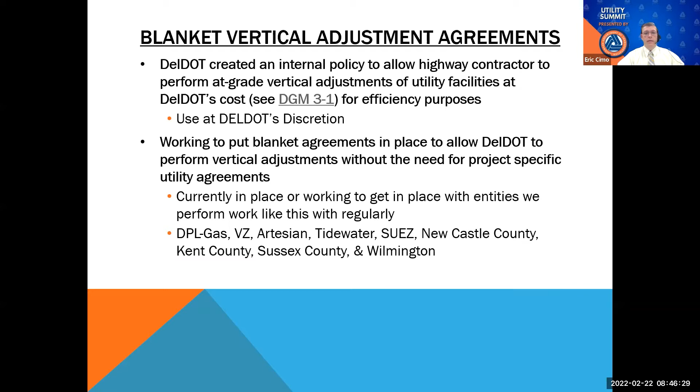So from an agreement standpoint, it's more efficient. And from a DelDOT highway contract standpoint, it becomes more efficient since the highway contractor can perform the work without needing to coordinate additional parties to come in and perform work.

Another thing we've put emphasis on over the past year, and utility companies will continue to hear a lot about, is cost estimates. I've provided information here on requirements from FHWA. Everything we do needs to meet FHWA's requirements. So information related to cost estimates can be found at their program guide on utility relocation and accommodation on federal aid highway projects. Again, the link is here.

These presentations will be posted, so everybody will have access to the links. This FHWA document is based on the federal code, the Code of Federal Regulations.

In particular, utility agreements are outlined under 23 CFR 645.113. That does include information about cost estimates. And then specifically, utility cost development and reimbursement requirements are set at 23 CFR 645.117. So we are working to make sure cost estimates we receive from utility companies are in compliance with these requirements.

So again, folks will continue to hear emphasis on this. I did include a snapshot here just to show the information that should be included with cost estimates. And I highlighted that estimates should include sufficient detail to provide the state and the FHWA with a reasonable basis for analysis. So again, this should echo what I've been telling folks through the monthly meetings and through the individual project coordination.

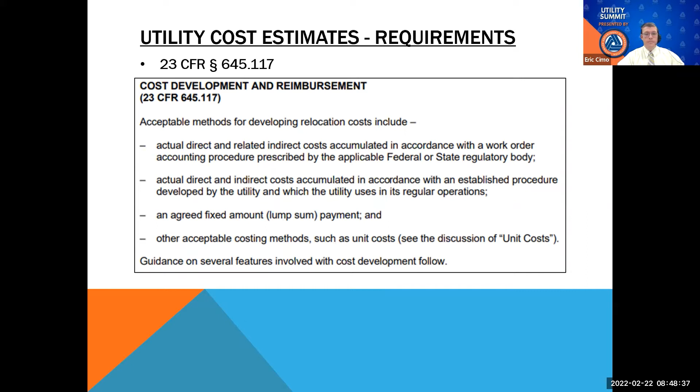This snapshot does come directly from that program guide. And then additionally, another snapshot just providing more information related to cost estimates. Just to reemphasize, estimates need to provide enough detail for DelDOT to verify the costs. I've shown some examples for how we can break out the costs to provide that detail. But unit costs and quantities need to be included, and that information needs to match whatever has been coordinated for the project.

Another item we've been putting more emphasis on the past year, really probably the past 2 years, is trying to improve our utility schedules. So we're having a lot of coordination in sharing what we call utility bar charts, also called utility relocation schedules. What we're trying to do with these is incorporate the highway project schedule and the utility relocation schedule, whether advanced or concurrent, so that we have a good projection for our highway contractor.

This is a requirement from the Federal Highway Administration, as mentioned previously. So we need to make sure that we're providing a good level of detail here, and it needs to be broken out by duration, or by activities. So it needs to include activities and durations, along with when in the sequence of construction the work is going to happen.

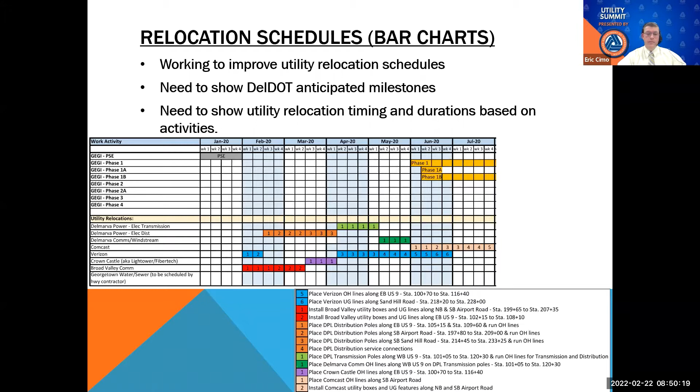So next poll question: which broadband providers are on the call today? Verizon, Comcast, Mediacom, Atlantic Broadband. If you guys could please provide insight there. Skynet. All right, thank you.

So broadband. FHWA has put a rule in place called the Broadband Infrastructure Deployment Final Rule. Again, 23 CFR 645. It was published December 3rd, 2021. The link is provided here. Again, folks will have access to this link once our presentations are posted.

But the point is to facilitate the installation of broadband infrastructure throughout the country. And what this rule does is it requires states meet specific registration, notification, and coordination requirements to allow broadband to move forward.

The main points for DelDOT: we need to identify a broadband utility coordinator, create a registration process for entities that want to be included in coordination, establish a process to notify broadband entities at least annually of our STIP, and coordinate initiatives with other entities including state and local land use and transportation, along with the broadband companies.

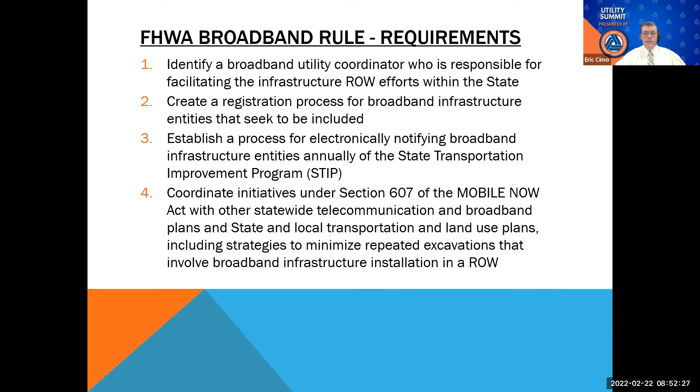So we're actively working to meet these requirements. Our goal is to create a web page with an online registration system. Once we get this stood up, we will be reaching out to the broadband entities already in our database to try to get this rolling, and then the information will live on the web page so we can make the necessary notifications.

The deadline, FHWA's deadline for us to have this up and running, is March 3rd. So we are hoping to have something out and up and running prior to that date.

All right, more questions. Where can information be found regarding DelDOT policy behind blanket vertical adjustment agreements? This is the test, to see if folks were paying attention or not.

All right, looks like the majority have it. That's DelDOT Design Guidance Memorandum, DGM 3-1.

Next one: where should I go to find more information related to utility cost estimate requirements? The DelDOT Utility Manual, FHWA's Program Guide, or DelDOT's website?

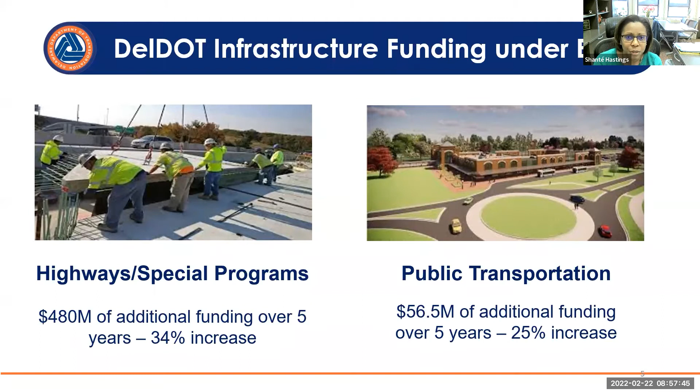We've got some new programs, and some increases to existing programs. On the new side, you heard the Secretary talk about resiliency and sustainability, so you've got EV charging under that for a little under $18 million over the 5 years.

You've got the Protect program, which is also resiliency and sustainability focused, at a little under $49 million for the 5 years. We have the carbon reduction program at a little over $27 million. We've got a significant increase in bridge funding, $225 million over the 5 years, or $45 million each year. And then lastly, our standard formula funding that we receive every year has been bumped up to $160 million for those 5 years.

On the EV side of things, we're going to be looking to strategically deploy EV charging infrastructure and really have an interconnected network. With the Protect funding, we'll be planning for resiliency improvements, evacuation routes, and at-risk coastal infrastructure. On the carbon reduction side, we're looking for any types of projects or programs that reduce transportation emissions or other carbon reduction strategies.

Bridges, as you all may know, we have some of the best bridges in the country. We are at under 2% of our bridges being in poor condition, so we're in really great shape. Part of that is because we have put other federal and state funding towards that over the years, and now we have this dedicated source of funding for the next 5 years. We're really excited to use that to continue to preserve, maintain, rehabilitate, and reconstruct our bridges.

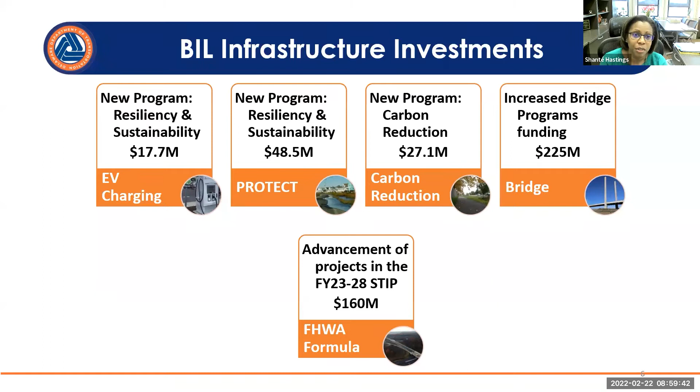On the formula side of things, you heard the Secretary talk about safety improvements, reducing congestion, making connections within communities—all of those standard standalone projects that we do. On the FTA side, a little under $57 million over the 5 years. We've got our Wilmington DTC maintenance building that will be done, some technology enhancements as well as microtransit expansion that we're looking to do, and really continuing to increase our zero emission fleet and infrastructure.

So why are the budget and the Utilities Coordination Council linked together? As the Secretary mentioned, it's very important for us to collaborate well together. We are charged with delivering this new, larger program, so we've got to find ways to be innovative and creative and communicate effectively so that we can deliver all of those projects that really improve transportation throughout the state.

Back in 2019, Senate Concurrent Resolution 48 was created, and it established a Utilities Coordination Working Group. That working group met over the course of 2019 and 2020 and made some final recommendations. One of those recommendations was to create a Utilities Coordination Council that would be in code and exist forever. So Senate Bill 152 was signed into law by the governor in September of last year. It created that Utilities Coordination Council, established 13 members to be on the council.

They're to meet quarterly, basically. They elect a chair and a vice chair every 2 years. And annually, they report on their activities to both the governor and the General Assembly.

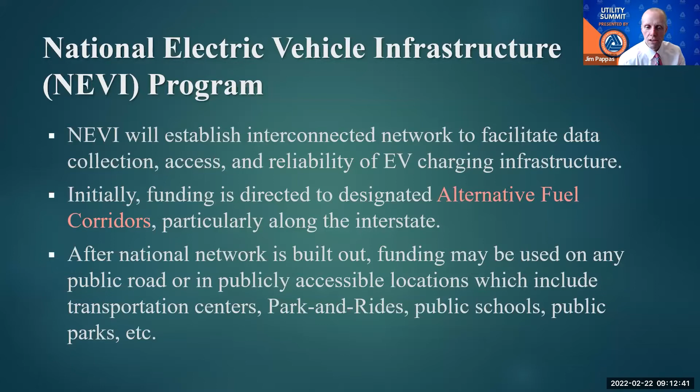We actually had a meeting yesterday with DNREC, and we're going to look to add some east-west corridors potentially as well. The first one that came up was 404 in Sussex County. If you're familiar with Delaware, a lot of people come to the beaches from the west, DC, Baltimore, Northern Virginia, and most come across 404. Ironically, we had a conversation with somebody a couple months ago who came to visit family in Lewes and mentioned there were no charging stations along their route until they got to Lewes. So we're going to look to probably add some additional ones.

There are some specifics here, and happy to have this conversation offline, but within the information we have there are some specifics on the capabilities of the equipment. The EV charging stations have to have at least four 150 kW DC fast chargers. So basically every infrastructure that we build, those are some of the minimum requirements that have to be there. This is what we felt was the perfect opportunity to let our utility partners know that.

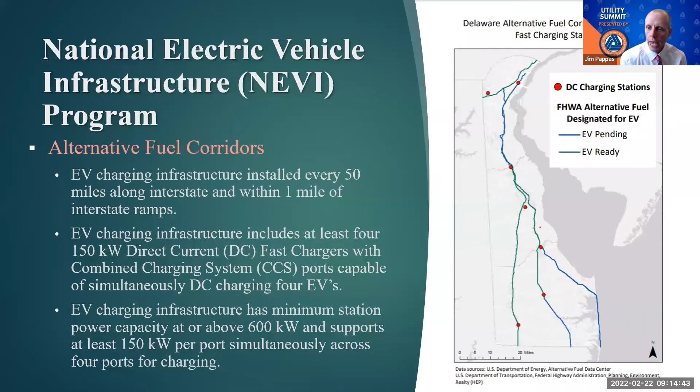We are looking at this information and developing a plan for the state. The idea is that we're going to be able to look at maps like this, find out where there are some holes, if you will, and look at strategic locations where we can add additional chargers.

The secretary started the conversation for today's workshop talking about equity. This is something that's very important to the department in all of our project planning, design, and implementation, and it is for the EV infrastructure as well. The general idea is we want to improve and encourage clean transportation. There are so many benefits associated with that, reducing greenhouse gas emissions, and also just making cleaner air for the communities.

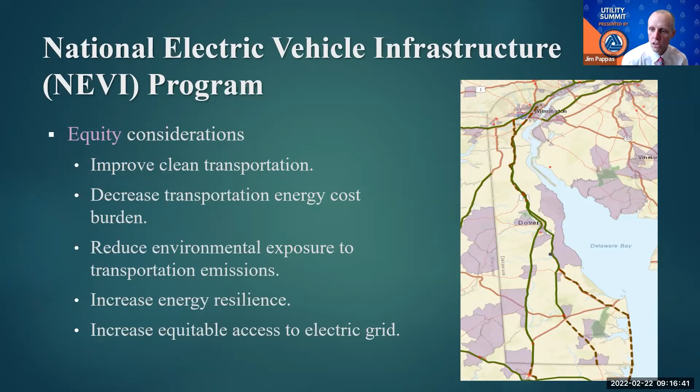We want our children and ourselves to be able to go out on a nice sunny spring day and play sports or just run around, ride their bicycles, and we want to make sure the air they're breathing is as clean as possible. So using these EVs and placing charging stations in strategic locations are ways that we feel we can improve that.

There are a lot of considerations we have to take into play as we develop this plan. A lot of this is repetitive to what I've already mentioned, and I'm happy to provide this slide deck if you want to reach out to me on a sidebar to go over this, because this is just a high level of things we want to talk about.

It was specifically referenced in legislation to work with your local utility operators. Again, we appreciate this opportunity to sit with this group and let you know where we are, where we want to go, and literally how we need your help to get there.

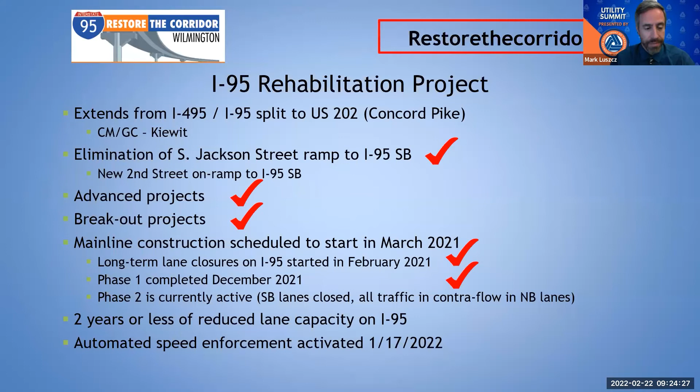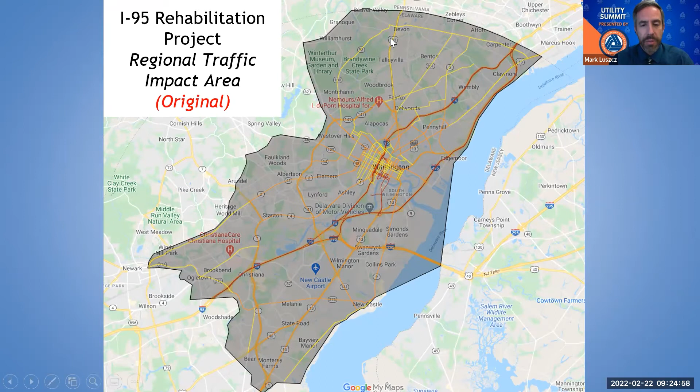So we've been coordinating with Wagman as the contractor and our design team, and of course with utility companies and right-of-way and environmental and all the fun things we do to get these designs done. The hope is - we've had a few advanced projects, but one more on southbound 95 should be kicking into gear shortly, and the main project we expect to have in construction later this year.

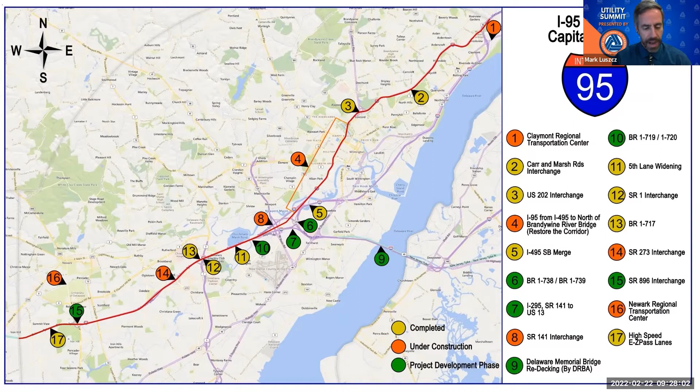There's also additional bridge work right on the curve, kind of in the middle of the 295 interchange - that's all 6, 7, and 10. We're trying to coordinate all those closely in the 2024 to 2025 timeframe. Let me see if there's anything else hot in this area... I think that covers 95.

We're still working out the details. Again, this will apply to any project requiring lane closures on certain roads - within this zone they're going to have an extra layer of approval. This project is different, obviously, than the Restore the Corridor project, but we are going to have a fair number of ramp closures, some short-term, some longer term. This area really covers all the detour routes of those closures.

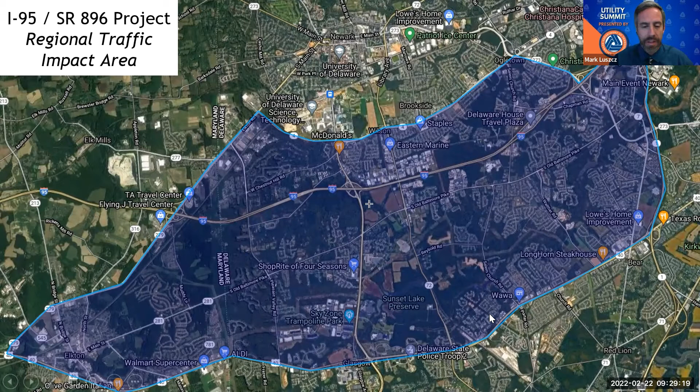So we just want to carefully coordinate and do our best not to impact the public worse than necessary. Stay tuned - there'll be more specific guidance on this coming out over the next month or two.

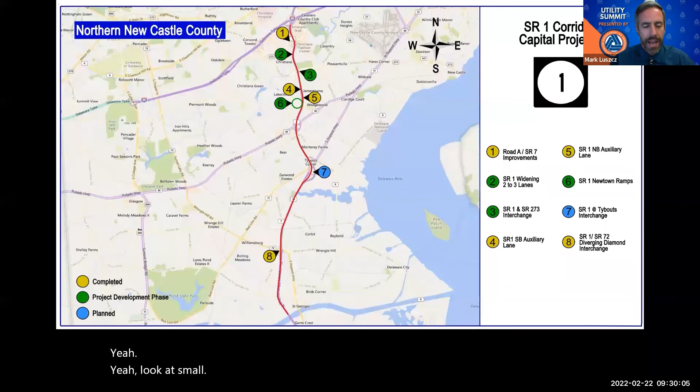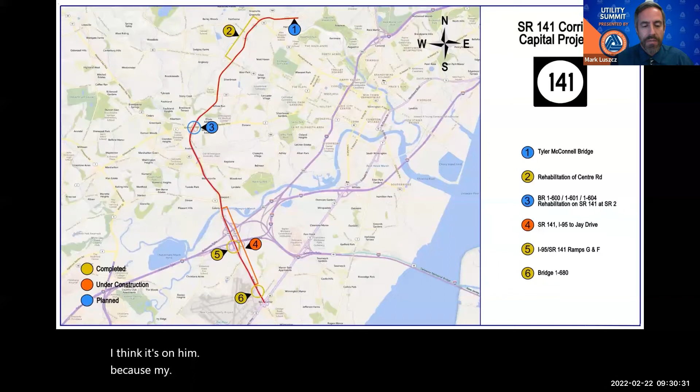All right, the 141 corridor. So I didn't talk about it yet, but the 141 job is mostly done. There's still some punch list work to do, and still some lane closures, but by spring we'll have everything totally wrapped up on that 141 job. Really along the corridor itself, nothing else particularly hot for right now.

There are a couple other things in this area I want to point out. They're not specifically called out but they are in this map area. The bridge 1-680 on South Heald Street on Route 13 going up into the city is a bridge project that's another one we're doing CMGC. We recently brought our contractor on to continue the design efforts there, so that job will have a lot of utility work involved.

And then also the Route 13 pedestrian improvements. We've been working on pedestrian improvements on the Route 13 corridor for several years. Many smaller projects have already been implemented: roadway lighting, crosswalks, parts of a bus lane in the northbound direction. Now we have two big pieces left over, and a lot of sidewalk has been installed through the paving job that wrapped up last year.

So we have a median barrier project we expect to have in construction by the end of this year, and also an additional sidewalk project that should be in construction in 2023. The median barrier project is the hottest one for now. We hope we have some leeway in how we design the median barrier, and the goal is to avoid utilities wherever possible, but we expect there will be some utility relocations needed as part of that project.

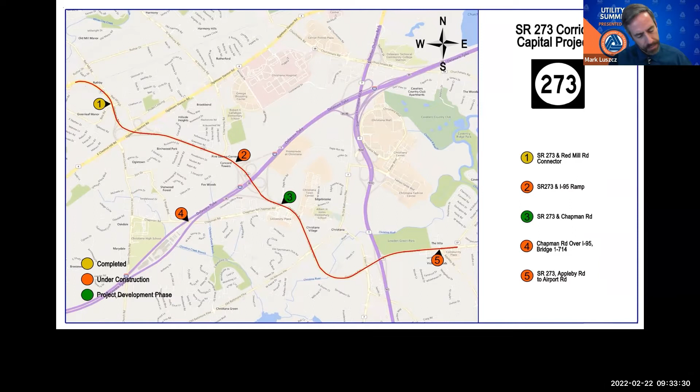Now, a hot corridor particularly from a utility standpoint in New Castle County is Route 40. Most, if not all, of your companies were involved in the advanced utility work for the Route 72 widening job, and that advanced work is completed. We'll be sending that to the DelDOT contractor side, which should be going out to bid over the next couple months, and then we can get that road widening implemented.

The Route 40 at 896 is another grade-separated intersection project, and that's going to have some big operational and safety improvements once completed. We'll likely have advanced utility work on that job, with construction expected in 2024. A little bit ahead of that is the Route 40 widening job from Salem Church Road to Walther Road - another hot one with lots of utility relocations, and we're hoping to get that into construction in 2023.

All right, and then we have the 299 corridor. That is in construction, of course, and that's one where there was advanced, but also concurrent utility relocations going on that project. So that one is cranking along in construction, and there's a couple other projects in the area, but nothing particularly hot.

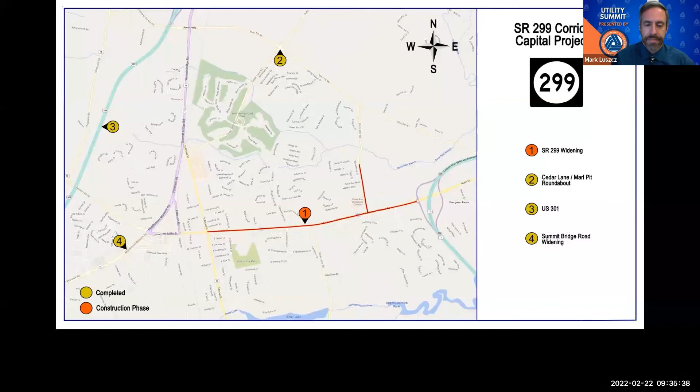All right, moving on to Kent County. We definitely talked about this, the Route 13 in the Dover to south of Camden area last year. Over the next few years, this is going to be a hotbed for construction and transportation improvements between the Route 13 widening projects and the Camden Bypass projects, and also the Walnut Shade Road project.

So say late last year, we did do some shuffling of schedules and rescheduling a bit. Now the Camden Bypass projects and Walnut Shade Road are both scheduled to start construction in 2023. Whereas number one on the screen, the northern section of the Route 13 widening, that's now pushed out to plan to start in 2024. And the lower section, the southern section of the Route 13 widening, is now scheduled to start in 2026.

So a little bit of shuffling around there based on a few things, but a lot of right-of-way acquisition needed on some of these projects. And that ties in, of course, with the ability for advanced utilities, so had to reschedule those a bit. So that's our current schedule on the 13 and the various Camden area projects.

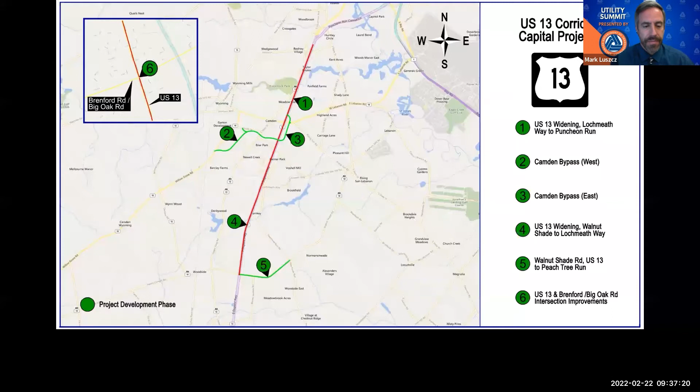For the main project, the design is expected to be complete by the end of the year. Based on our old funding plan, we weren't going to have funding for that until the out years, 2027 or 2028. The hope is, as we finalize our updated financial plan, taking into account the new federal infrastructure bill, that we can advance the schedule for the rest of that Kenton Road project. So stay tuned for more information on that.

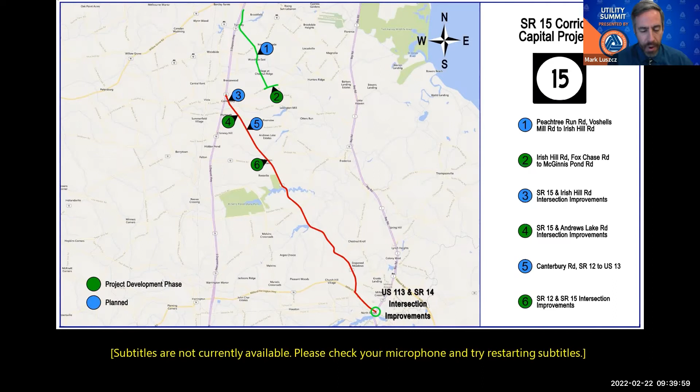On this screen, the one that is farthest along and ready to go to construction, hopefully this fall, is down in Milford, the 113 and 14 intersection.

All right, and then this is kind of the segue slide of Route 1, obviously the northern end in Kent County and the southern end in Sussex County. So really most of the work currently in the CTP in Kent County is complete. All the new grade separated intersections like Frederica, North and South, and Little Heaven and Thompsonville. So all those are complete.

So switching into Sussex County, the hot area of Route 1 is really between 16 and 5 Points. The Route 16 grade separated intersection is going out for bids early this year. Advanced utility relocations have been underway, and we hope to start construction on the main project later in the summer.

Then we have Minos-Conaway, number 12, and Cave Neck, number 11. Both of those are deep into design. The alternatives have been selected. We've had lots of public outreach. So those are cranking ahead. Both of them are hot in the utility area, with lots of utility relocations that need to be coordinated.

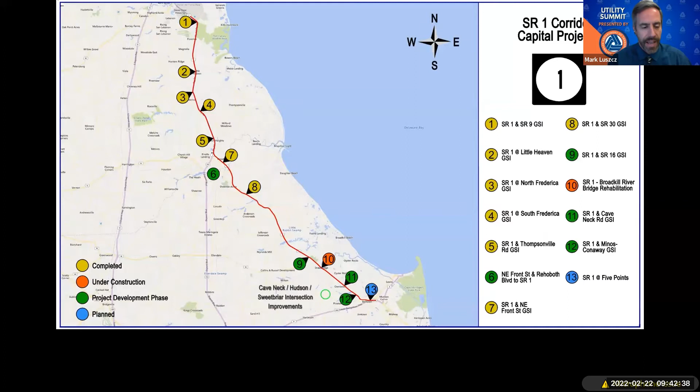Continuing with Sussex County, we have our 113 corridor. Deep into design is the 404 grade separated intersection at the north end of Georgetown. We're also working on the 16 GSI up in Ellendale, and the North Millsboro bypass in Millsboro. All those are going full bore, particularly the 404 GSI, which we hope to be in construction in 2024. North Millsboro we hope to be in construction in 2023 and completed in 2025. That's the goal.

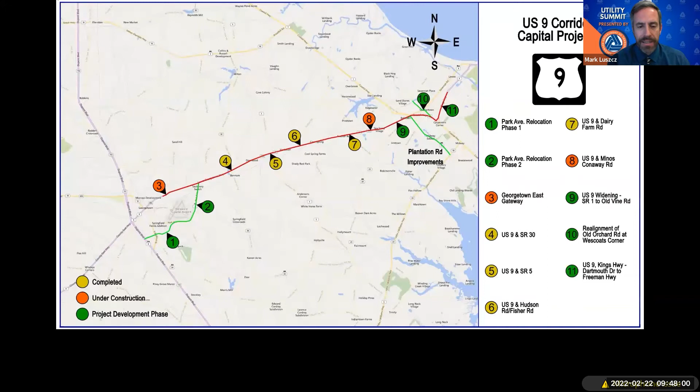All right, and depending on your perspective, saving the best for last: the Route 24 corridor. A lot of work going on there, either in construction already or about to be in construction shortly. On the eastern end, the widening from Mulberry Knoll to Route 1 is mostly wrapped up.

As I was mentioning earlier, we have the Plantation Road project between Route 9 and Route 24. The northern section, now that I have my notes in front of me, we expect to PS&E shortly, so that'll be in construction later this year. The southern section, we're going to be regrouping based on some other analysis of other roads that are part of the Transportation Improvement District, so probably restarting design on that later this year.

Then we have projects 2, 3, 4, and 5, all shown as green right now. Within the next few months, they'll switch to orange on this chart as they'll all be in construction. So, 24 Love Creek to Mulberry Knoll: we have the advance duct bank work hopefully getting implemented within the next few weeks or within the next month, and actual PS&E on the job shortly. So construction starting in the summer.

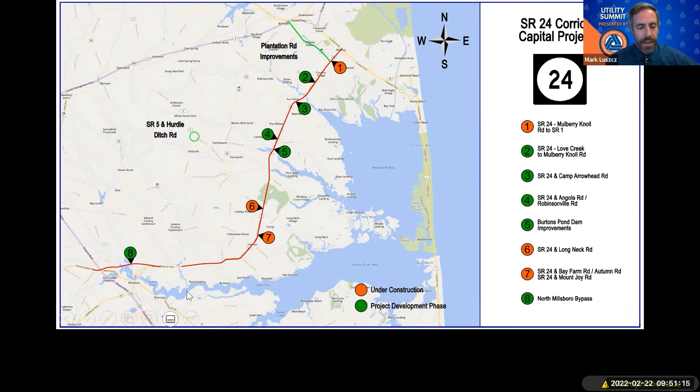So with that, I obviously ripped through that very quickly. Hopefully, all of you, whether you're on the design side at DelDOT, one of our consultants, or one of the utility companies, are well familiar with these projects anyway, given all the coordination that our design teams and utility groups are doing. And so that is all I have.

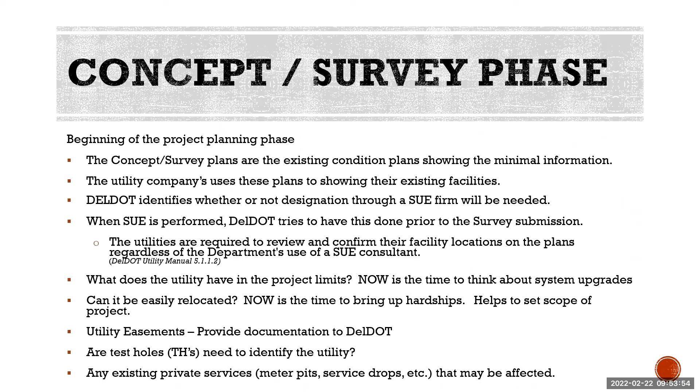Also, this is a good time for utility companies to see if they have internal facilities planned for upgrades, relocations, old mains, or electric that may be incorporated into the project. Most importantly, we need to know if the utility company has any facilities that cannot be easily relocated or an outage that can't be provided. These are things we need to know early on.

The preliminary phase is the first look at the design of the project. At one point, someone mentioned it was a good time to see where the poles are going, but that's not really true. We need everyone's information, whether it's due to conflicts, upgrades, or not relocating, the utility companies still need to respond. And no, resending your as-built is not a true submission.

We understand that we may not have enough design details for the utility companies to know what the conflicts are early on. Most of us don't want to redesign a project more than we have to, but there are reasons why acquiring this information is crucial, one step at a time.

Without the utility company's proposed alignments early on, we're unable to design around or make sure there's enough room for everyone within the footprint of the project. We need early insight on the project's impact so that we can plan for the right-of-way and the PE needs.

We need the utilities to tell us about their right-of-way needs and to incorporate where we can and coordinate where we can place your facilities. Did you know it can take up to a year for us to acquire the right-of-way and PEs?

It really does. So we have to understand the parameters of the project, then we can prepare for the utility issues we may have. By providing us the information along with your easements, it helps us determine the path forward. It gives DelDOT an idea of additional cost for the project.

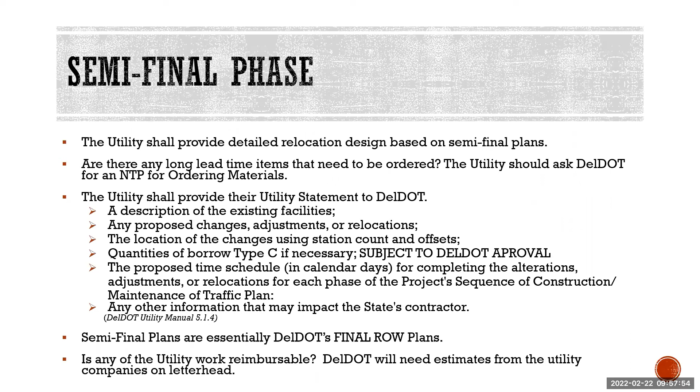Final plans. We arrive at the final plan stage. Now is the time to verify the relocation design based on the final plans. Utilities should have their in-house construction drawings completed prior to the final plans to verify there are no issues or conflicts. This is not the time for the utility company to begin internal construction drawings.

If you wait until this phase, any changes the utility construction department wants may not be accommodated. So get their input early. Designers need to know and take into account all existing facilities and operations, proposed phasing, improvements, highway drawings, and all the existing and proposed utility relocations.

Yes, we have occasionally changed the design of the project in this phase. That is why it's important for the utility companies to just take a look at all the plans. We really don't want to overlook anything, though it does happen.

So I have a question for you, and it's interactive. Why does DelDOT have so many phases?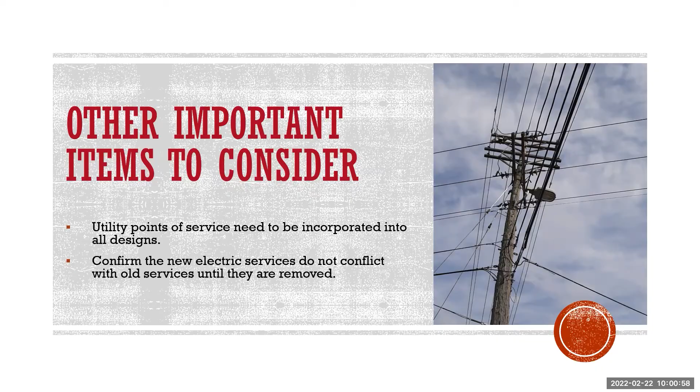Another item to consider is how the proposed aerial lines are being installed crossing existing facilities. This example shows the proposed aerial alignment lines crossing an existing facility. As we relocate, the question is, how are we going to keep these facilities in service while the proposed facilities are being relocated? Keep in mind that an outage may or may not be feasible. Therefore, this needs to be considered as utility companies are creating their design.

My next question: how many times more chickens than there are people in Delaware?

So if you've answered B, 200, you are correct. There are 200 times more chickens in Delaware than people.

Design changes, let's take a look at them. One of our favorite topics and the biggest question is, why are we making design changes so late in the project? Why are these changes? It's because of drainage in the final plans, or the alignment was changed, or we're adding work so late. Didn't we consider this before?

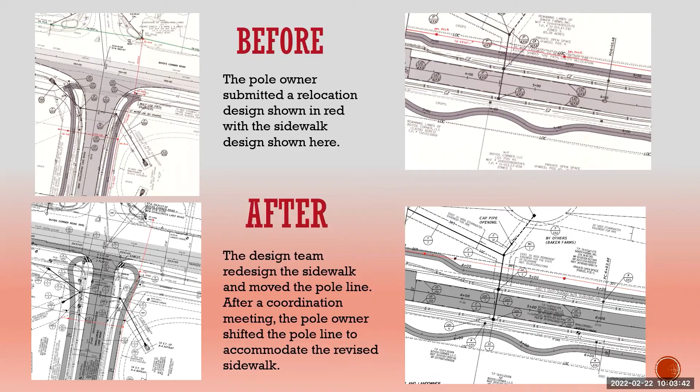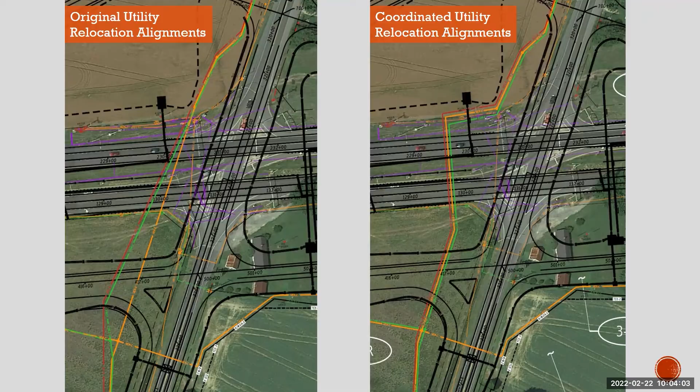Moving into utility changes their design after everything has been submitted. Again, my first question is why? As we talked about in the previous slides, all the design and constructability of a submitted utility relocation design should have been completed. A minor tweak here or there isn't a big deal, but anything major is.

Currently, we have a project where a pipeline company gave us final plans in June of '21. The NTP was issued in August of '21 for advanced relocations. This past November, their construction team reviewed the project and changed a large portion of the relocation design.

Construction is expected in April of 22, so DelDOT and the utility company still do not have an approved design. At this point, advanced relocation may not be possible due to the construction phasing, and the utility may be relocating during construction. This will cause a delay to the project and will cause the project to go over time and budget most likely.

This is why it's important that you submit a constructible final relocation plan. Your change may be good for your facility, but may not be good for the others. Unless you coordinate these changes with the design team and other utilities, a major change in design cannot happen.

Is the project constructible as designed? This is a very big question. Everyone zones in on their area of expertise. So this is why we have several sections involved in the project's review.

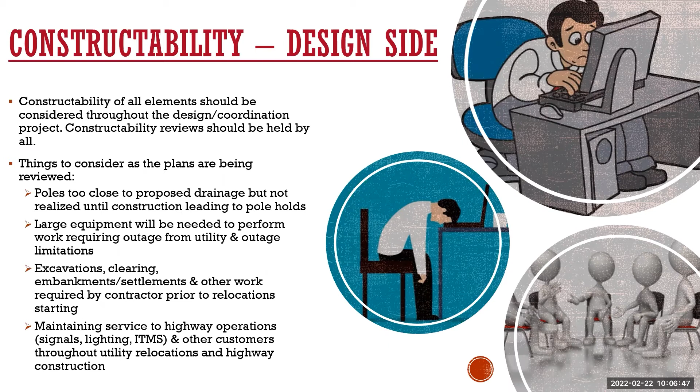Between the preliminary and the final plans phases, this topic of advanced relocation does come up. And why do we need advanced work? Well, having utilities relocate in advance makes sense if there is a lot of conflicts with roadway design, and it may be constructed with minimal impacts to the project and less impact to the public.

However, some things will need to be done prior to advanced relocations, like clearing and grubbing, relocations of fences, mailboxes maybe, or whatever, so on. And if we have authorization to work on the property, with advanced work, as much prep work as possible should be performed and stakeout is requested.

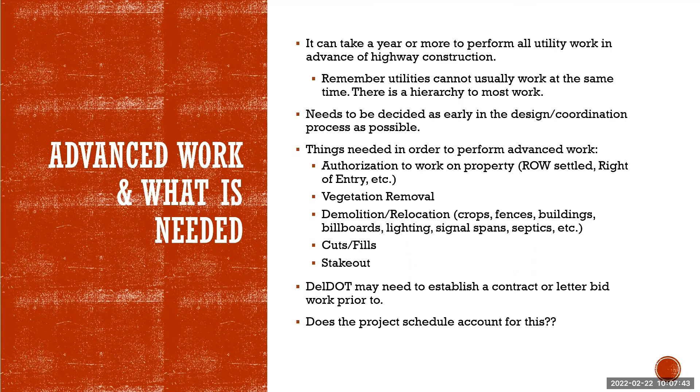Now, the big question is, does the project schedule account for advanced work? And I have another question.

What are the most useful components of advanced utility inspection?

Okay, if you answered all of the above, you are correct.

Utility inspection team is a must. As we just decided to have the utility companies go in advance of construction, now what? The question always becomes, who's going to inspect the work? Over the years, our construction group has had a team perform the inspection. Though this has been great, we find that the area of utility installation is an unknown and requires different skills.

Recently, we've had utility inspectors on projects and it's worked out tremendously. And why do you ask? For starters, having one person is great. Any questions, issues, conflicts, we go to them, they handle it. They are the go-to person.

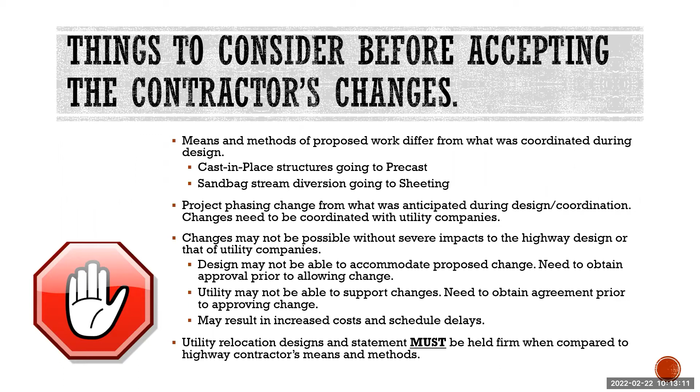Things happen, and there are times when the utility companies need to change their design. Though it may sound easy, it's not. The utility statement of work has to be held firm. This is why utility companies have to have their construction people involved early on, as I stated before.

And once the utility company receives their NTP, they should be preparing their bid documents and packages, not designing their internal plans. Also, the design changes may cause issues with the other utilities involved in the project, not to mention the project's design schedule.

Any changes have to go back to the review process for approval. Any changes can be costly and delay the project. Therefore, we need to hold to the utility statement and schedule that we set forth.

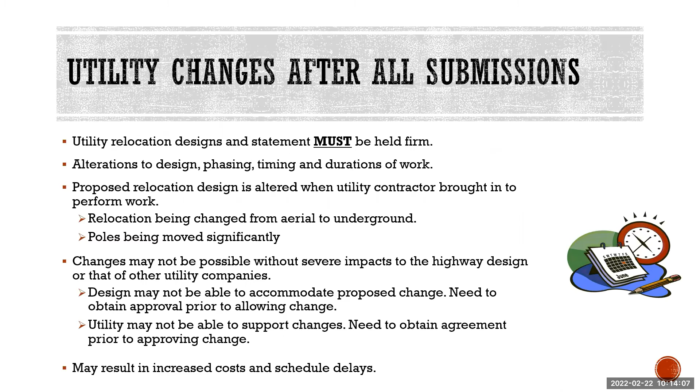When we stumble upon these issues, a design change has to happen in the field. Sometimes it's minor, but not always. One thing we want to mention is any design change during construction has to be reviewed and approved by the project engineer, to make sure it can be done. We want to avoid impacts to the project and other utilities with any changes that may occur.

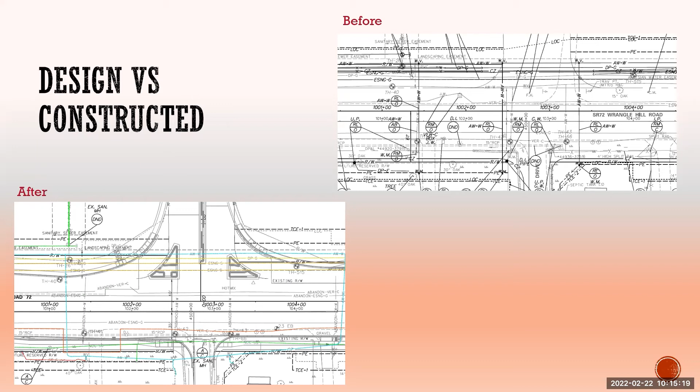Paving rehabs, oh my. Everyone's favorite, a good paving rehab project. Did you know that it's most of the state's budget? It sure is. These projects are quick turnarounds and should be the least impactful.

Therefore, the minimal amount of information is gathered and several locations are bundled together. To top it all off, there isn't a formal schedule for this project. So unfortunately, we can't give you an answer as to when, other than it will happen in the next couple of years. We understand it's a challenge to the utility companies when there is a cost, but not a year to budget for it. We are doing the best we can.

Maintenance projects. Maintenance projects are just that; they perform maintenance on the state's infrastructure. These projects are just like the utilities maintaining their own facilities.

DelDOT usually has an open PO with a contractor that repairs anything from drainage issues, guardrails, paving, you name it, they do it. Therefore, these projects come up fast and we do the best we can to let the utilities know. Design managers need to understand when utilities are involved.

Time needs to be taken into account for possible relocations, especially if there is reimbursement for the work. And the utilities need to understand the state needs a quick turnaround in their responses to keep moving forward. Delays cause everybody issues.

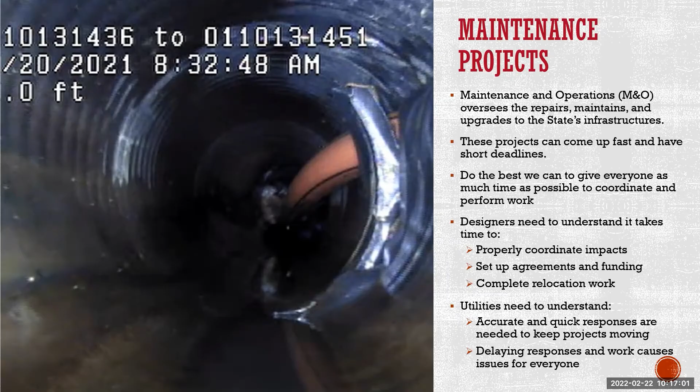And my last question: which public utility system came first in the USA?

Okay, if you picked water, you are correct. In 1755, Hans Christopher Christiansen instituted services for the first public water works in America in Bethlehem, Pennsylvania.

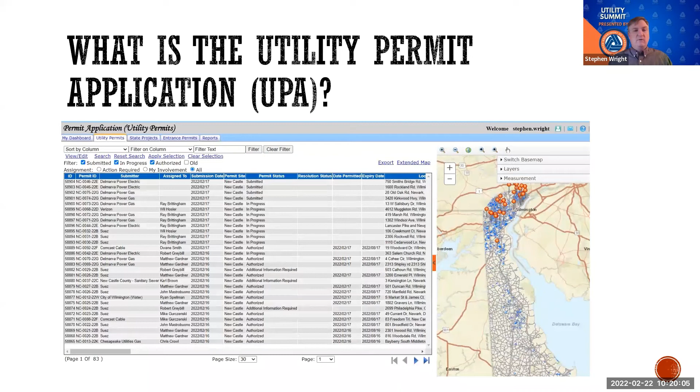And why do we do that? Why does Public Works do all those permits? DelDOT's Public Works is in charge of inspecting construction within the state right-of-way for private construction, the scary non-DelDOT part, to keep coming back to Debbie's presentation. Do we document all that just so big brother can always be watching? Absolutely, that is our primary purpose, is to track you guys and be big brother. Not really. There's a lot going on in the state right-of-way, and fundamentally we have to track that so we can make sure that transportation is moving safely and effectively.

Every road is always under construction in some fashion, every single day. There's private construction taking right-of-way every single day. There's utility maintenance and new construction taking place in the right-of-way every single day. And we need to be able to coordinate all that so there's not conflicts, or to at least minimize the conflicts of all that activity, while still maintaining a safe, drivable and passable roadway network for the citizens of the state of Delaware who utilize it every day, who need it every day.

The permits are how we document and move all that activity in the right-of-way to minimize those impacts. Finally, the permits are how we track what is physically in the right-of-way to inform future road construction projects and maintenance of existing facilities. You saw the pictures of the projects from previous presenters, Debbie and Mark, where they showed what was in the right-of-way. That's one of the first steps in how we track that. We know who's in the right-of-way in each individual section, and we use this to help inform those decisions of who's going to be impacted whenever anybody's doing construction.

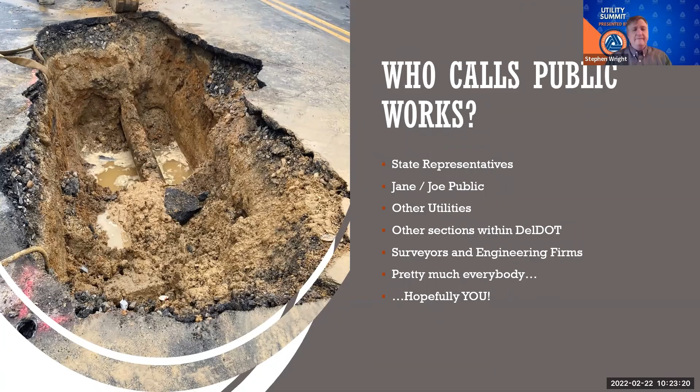And these are happening every day. This is just a random photograph of a random water main burst. We had our first bad winter in about two or three years, so we've had a lot of these this winter. I'm sure a lot of the folks at this summit have been dealing with this all winter. This is a very common sight on our roadways, specifically because of the first bad winter in a number of years. This stuff happens, and we need to make sure we're prepared for it and tracking it.

What does Public Works do after that random citizen calls? We identify the location from the contact. If you've ever been contacted by a random citizen who says there's a pothole, you know it's a very challenging process. Most people actually, ironically, can't find a location. It's shocking in this day and age of GIS, where most people can't figure out where they're at when they're doing something. So a significant part of our job is literally just going out and trying to figure out who's complaining about what and finding the specific problem.

Then a public works inspector lays eyes on the issue to field verify and predict the cause. And I say predict the cause legitimately, there's all kinds of reasons why a pothole can be out there, all kinds of reasons why a section of roadway can fail. We have to make a decision on who we think is most likely the culprit. It could be DelDOT itself, it could simply be a failure that has occurred in the roadway and we need to get maintenance out there to fix a pothole. That absolutely happens every single day.

But the other problem is it could be a utility that put in a patch. It could be a failure of a system underground that has caused a hole to form underground, which has then caused a failure of the roadway above or the sidewalk above. Or it could just have been a construction project that didn't have the best patch. So the root cause of the complaint is not always obvious.

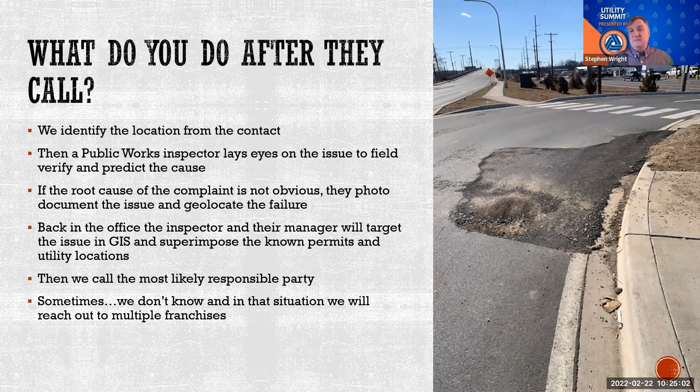We photo document the issue and geolocate the failure so we can then track it down to others. Back in the office, the inspector and their manager will target the issue in GIS and superimpose the known permits and utility locations. They will call who we consider to be the most likely responsible party. Sometimes we're wrong, there's a lot of places where utilities overlap and cross each other, and sometimes it's not utility A, it's utility B. These things happen. But we reach out to them and let everybody know when we get folks out there to get them fixed.

So, do you have any questions for me?

But with that said, do you have any questions for me?

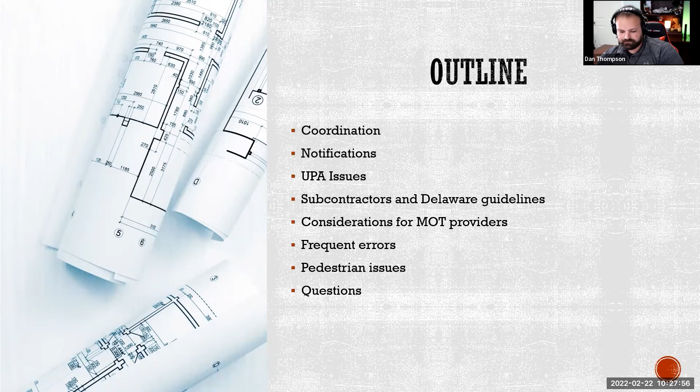All right, so coordination. Prior to the utility permit submission, if there are any questions about the MOT or anything that you guys may come up with, feel free to contact the utility section and traffic safety. We're more than willing to help guide the correct direction, so there isn't any holdup or back and forth in the UPA. I'd rather get a phone call—any of us would—just to keep the process moving, and that way when everything is submitted, we can just push it right through.

Coordination with capital and advanced utility relocations—these will all have a set of approved MOT plans, so any changes or modifications will have to be coordinated with traffic safety and the construction staff. They're typically going to be held in place, but we may be able to make some small modifications. Any advanced utility work that comes along with a capital project will be governed by the restrictions given to that project—any time restrictions, lane closures, any typical applications given in that project will be the MOT you guys will have to follow as well.

And then we'll also need you guys to make sure everybody's playing well together in the sandbox. So make sure that you're coordinating with adjacent projects so that any road work or construction or MOT happening in the area doesn't overlap and that everything is in compliance out there.

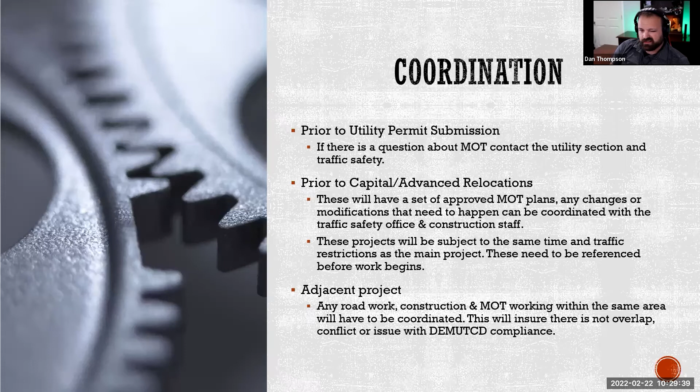All right, so some common issues that we see in the UPA—typical application submission. When submitting the UPA permit under the typical application section, there's an actual section for that, and make sure you provide the TA that you're going to be utilizing. A lot of the times we find that they're blank or put in the wrong spot, they're hard for us to find, and that just kind of holds up the process. Just make sure everything is being submitted where it needs to be.

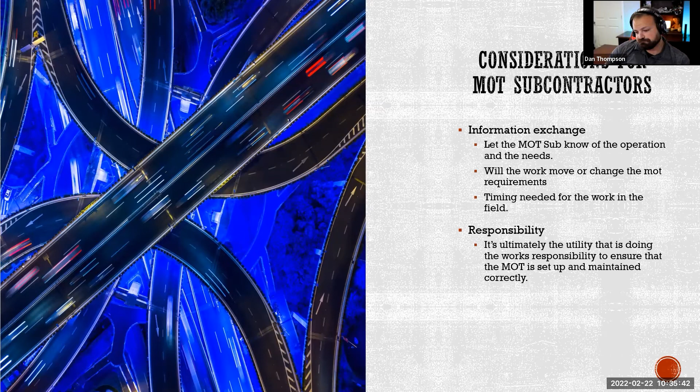Some errors we see with flaggers. So when you're flagging in the state of Delaware, you need to be certified in the state of Delaware. Some states just follow set federal standards, just like with our MUTCD. We need to make sure that the flaggers flagging in Delaware are certified through somebody like ATSSA, who we recognize, and their card will actually say Delaware on them.

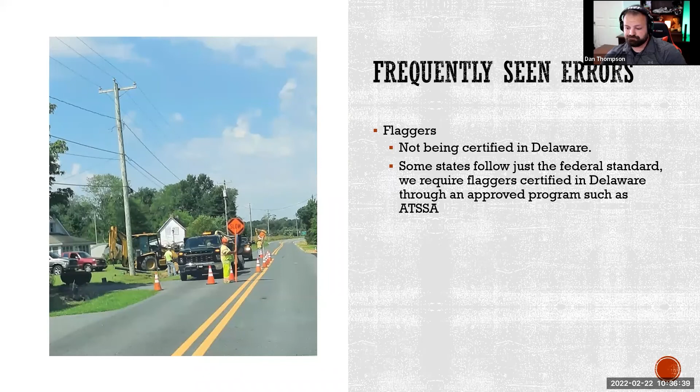Some of the errors we'll see with signage: incorrect height. Temporary signs, your daily signs, have to be at least 5 foot from the top of the road surface to the bottom of the sign. Incorrect spacing for the typical applications or the roadway. I'll have a chart in the next slide or two, and you can reference the MUTCD for that chart. Based on your roadway and your speed, you can figure out what your sign spacing should be.

Another issue too with one of these photos we have is signs being stored in the right of way when they're not in use. So if you're going to be on a site for a week, two weeks, however long, when you guys are done at the end of the day, all that signage needs to be picked up, removed from the right of way, either put behind positive protection or removed from the site until the following day.

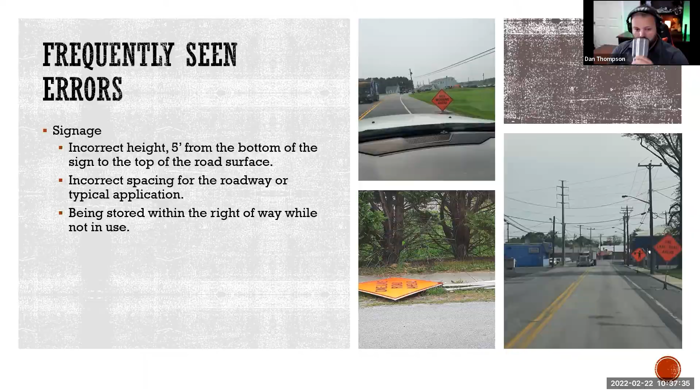So the next slide here is your typical applications and your calculations. The one on the left is a typical lane closure on a multi-lane highway. The one on the right is a typical lane closure on a 2-lane roadway, probably the ones you're going to see and use most of the time. The charts in the middle, the one on the bottom, is for your advanced warning sign spacing - it depends on your type of roadway, and that'll get you your sign spacing. The chart on the top, that's how you figure out what your taper and tangent lengths are going to be, based on roadway speed and type of roadway. And if you're shifting, there's some different calculations in there as well.

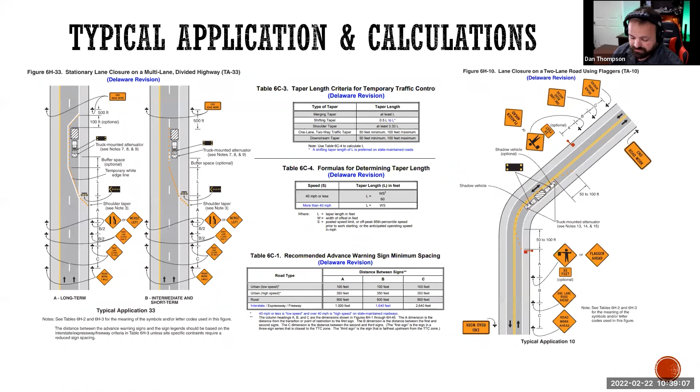Rolling roadblocks - this is another special case of MOT that we use. You'll see this mostly with aerial crossings when you need to stop multiple lanes of travel to run like a span of wire or something across the road. We don't allow live traffic under something that's not secure, so we'll use a rolling roadblock. We'll have TMAs in each lane, police officers out there blocking the entire roadway so that run can be done.

So these need to be pre-approved and coordinated with traffic safety. We like to come out and make sure that everything is being done as it should be. Usually these only take 10-15 minutes depending on what your guys' needs are to get the utility up and secured.

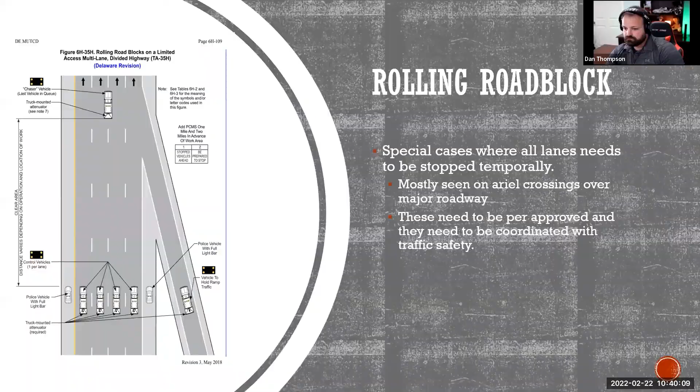Pedestrian issues have become more prevalent as we have been growing our pedestrian facilities. We need to maintain them. Pedestrians are treated just like a vehicle, so if you block a sidewalk or block a curb ramp, it's the same thing as blocking a lane. So that ped or that bike needs to be provided for. It's important to know the area that you're working in because it can become tricky, especially down here in the beach area.

You can use pedestrian detours. If a ped's taken away from their sidewalk, you can build a path with approved material. You can do dedicated pedestrian flagging, or if the facilities are there and it's set up like a block configuration, you can do a detour pretty easily. Those typically need to be submitted prior to when you're submitting the UPA or something of that nature. Just submitting a typical 'hey, we need to put up a pedestrian detour' probably isn't going to cut it, because every situation seems to be a little different. So that's one of those situations where you can feel free to reach out to us and we'll certainly help get you through and get you the best option there.

We do have specific MOT down in the beach area south of Dewey. The shoulder is actually a bike and pedestrian lane, so we've come up with a typical application where you're actually going to close the lane adjacent to that shoulder, put the peds and bikes in it, and then you're going to have the work area in the shoulder. It involves placing channelizing devices a little bit differently. You're going to separate those peds and bikes in that lane as well, and then you're also going to have specific signage in there too. But we have that all on our plans here.

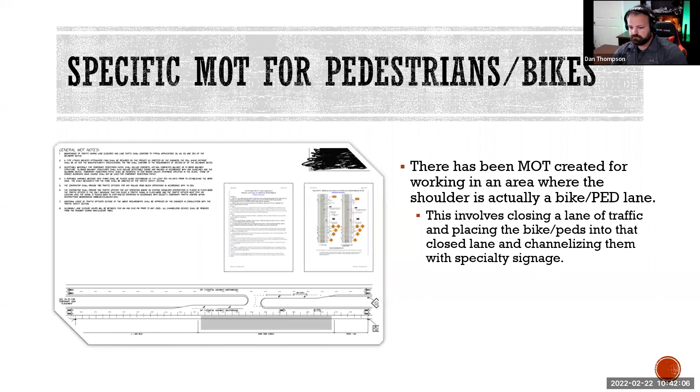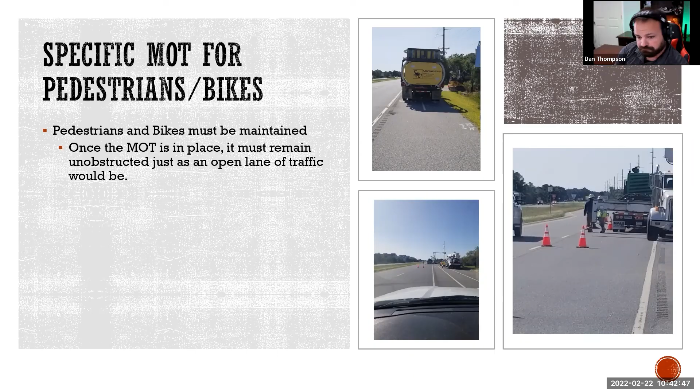So if you guys need to close a road, do a detour, submit a detour into the UPA, there's a process for that. They need to be submitted to traffic safety for review and approval. You can do that prior. I would suggest that you do that prior to the submission in the UPA, so when you submit everything, everything's already done and approved.

It's got to be on our border and legend. It has to be signed and sealed by an engineer. It needs to be uploaded to the permit in the UPA. The project manager with DelDOT on our side will have to submit a road closure form along with the signed detour. Once that's completed, the traffic safety officer for that specific district will approve the road closure, and then everything can proceed. If you have questions about detours or where to submit them, David Wynn is our contact within traffic safety, and I've attached his information here.

And that's what I have. So if you guys have any questions and we have some time, I'll certainly answer. Thanks, Dan. So there are some questions, so I'll go over those for you.

First question: is there a link we can get containing a constantly updated list of contacts for all 3 DelDOT areas, including inspectors, traffic safety, and utility section contacts for MOT considerations? As far as I know, no, but we can certainly put something out to the utilities and push it out as we get new staff in. I don't think we have a site where you can go see who the current safety officer is. Yeah, and I believe that's the case for the public works offices as well. So we can talk about that further and see what we can do there.

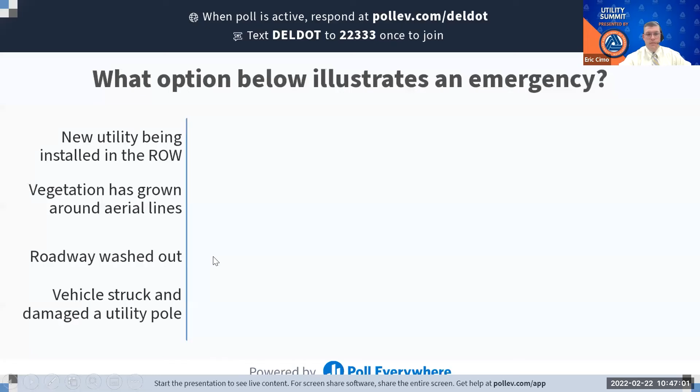All right, so poll question: what option below illustrates an emergency? New utility work being installed in the right-of-way, vegetation has grown around aerial lines, roadway washed out, or a vehicle struck and damaged a utility pole.

All right, so this is a bit of a trick question. C and D are kind of obvious, but A and B could also constitute an emergency depending on the situation. So what is an emergency? Delaware Code defines an emergency, and the utility manual references those definitions. The first one comes from Delaware Code, Title 26, Chapter 8, the Miss Utility Law, which states a situation where the safety of the traveling public or general public, or the structural integrity of the highway facility, is placed in immediate danger. Delaware Code further references any condition constituting a clear and present danger to life, health, or property. So essentially, it's a situation where immediate action is required.

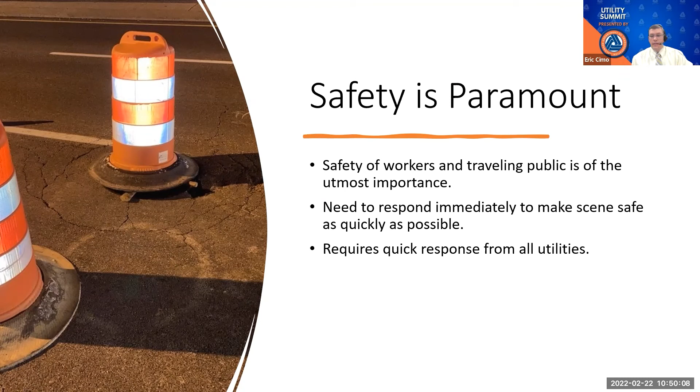So the pictures you'll see in this presentation, most of them are from Delaware situations. The one shown here was actually a situation up north, and this is what it looked like under the drum.

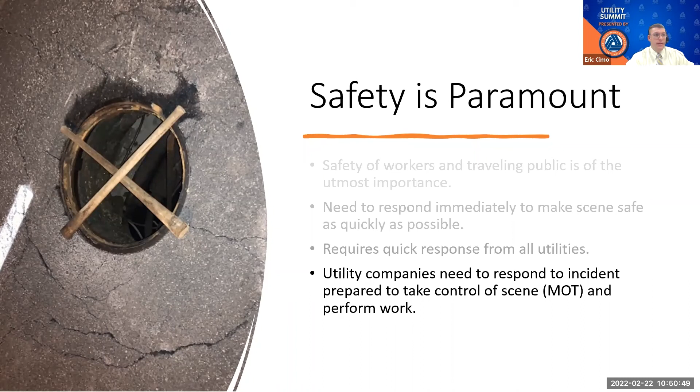So again, utility companies need to respond to an incident prepared to take control of the scene. I know there's been a lot of these brought to my attention recently, and when we find out about it, we try to reach out to the utility companies that may be impacted, and we try to get resolution as quickly as possible. Unfortunately, a lot of these situations occur outside of business hours, so that's where communication becomes paramount. Everybody needs to be prepared to come to the scene immediately and start working.

So what are some different types of emergencies? Could be main breaks, cables down, poles down, a situation where an excavator damages a facility. Or it could be down vegetation, or vegetation that's leaning into cables. Obviously, from an electrical standpoint, that's going to receive a lot of quick attention, but it's also important to address the comms component. Even though those may not have electricity running through them, it's still a dangerous situation, and we need everybody's assistance in trying to resolve those issues.

So I'm going to turn it over to Jerry to take over the MOT portion.

All right, thanks, Eric. Can you hear me? Yeah, we got you, Jerry. All right, cool, awesome.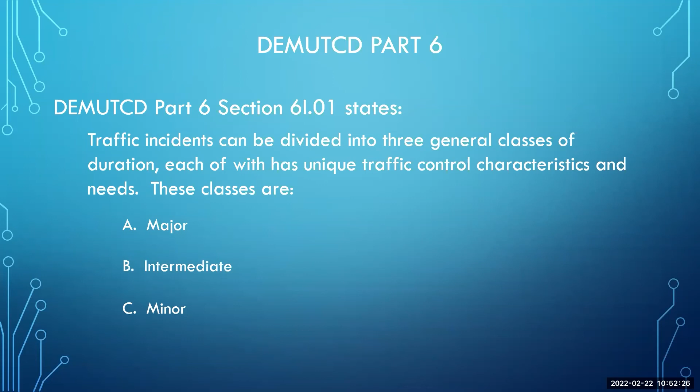All right, so we're talking about the DE MUTCD Part 6. Part 6I in the manual relates to emergencies. Traffic incidents can be divided into 3 general classes, each with their individual unique traffic control characteristics. Classes start with major incident, intermediate, and minor. A major incident is defined as an expected duration of more than 2 hours. Intermediate is expected 30 minutes to 2 hours, and a minor incident has an expected duration under 30 minutes.

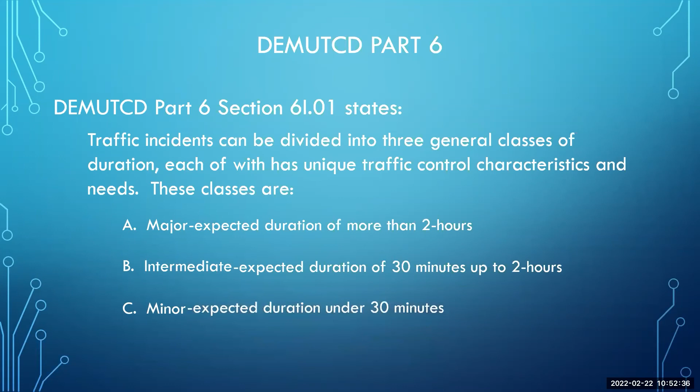So what's the reality? Most utility emergencies fall into the major class. Some things to note: most of the time DelDOT's on scene before the utility companies are. Just note that this is temporary in nature. If the emergency falls into the major category, mobilize your MOT immediately to take over for DelDOT.

This is especially important during storm events, because with winter season, DelDOT is focused on plowing and salting the roads to get things opened up. We can't tie up our forces on a lot of down utility lines or water main breaks or what have you. So the faster you can mobilize your MOT, the better off everyone will be.

Again, it's been hit on a few times about communication. As soon as you're on scene, contact DelDOT's Transportation Management Center. You can call in the number or #77 from your cell phone and contact DelDOT's Public Works Inspectors. This is basically to establish points of contact. Stay in contact with the TMC, give hourly updates so that everyone knows what's going on and we can alert the public as well.

Then notify the TMC once all the work is completed and everything's been reopened.

We'll talk about some primary functions of temporary traffic control, especially during incidents. We need to inform road users of the incident. How many times have we had the road closed and people come up to us asking what's going on? We just have some cones and a truck out here. We need to do a better job of informing motorists as to what's going on, and we need to provide guidance around the path to follow. This is really important, because if we help motorists get around the scene, it protects the utility workers and lessens drivers' frustration.

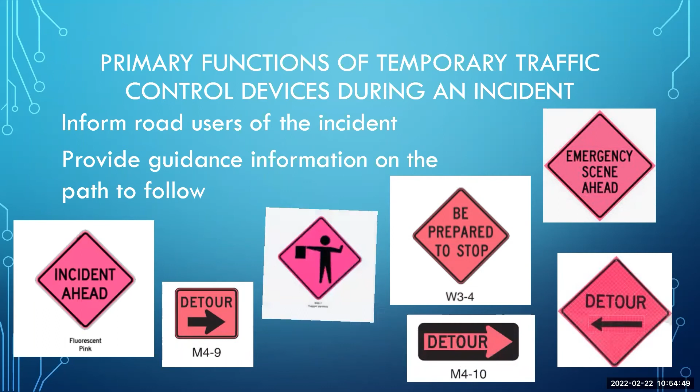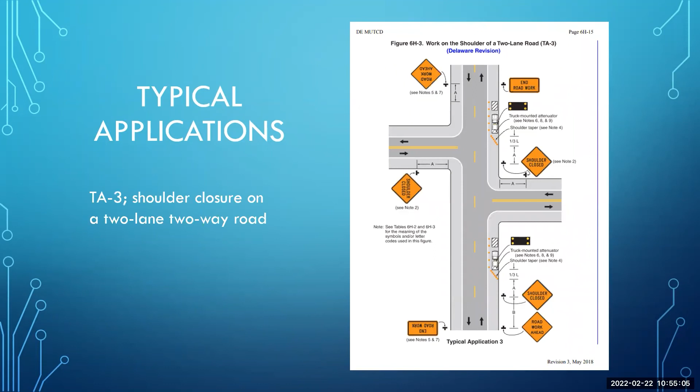So I'm going to go over some typical applications. I know Dan touched on a couple that are primary to utilities. We have the TA3, which is basically a shoulder closure on a two-lane two-way road, and TA3A, which is also a shoulder closure on a multi-lane roadway.

TA13 - Dan touched base on aerial work, working over live traffic. This is basically a 15-minute road closure on a 2-lane, 2-way road, where flaggers just stop traffic so aerial lines can be pulled across or plates can be shifted around for an open trench, or things of that nature. Typically we like to do these on low volume roads, however we have allowed them on higher volumes just during off-peak times.

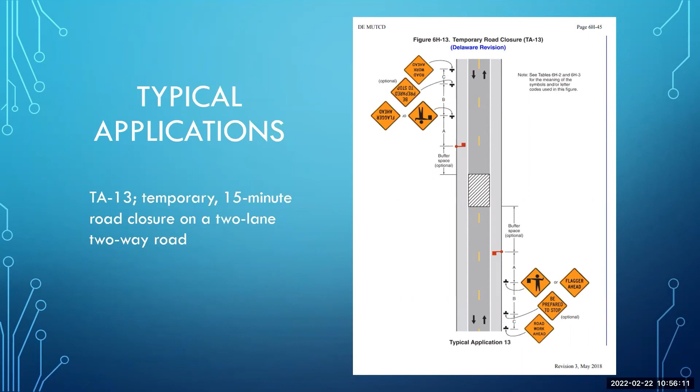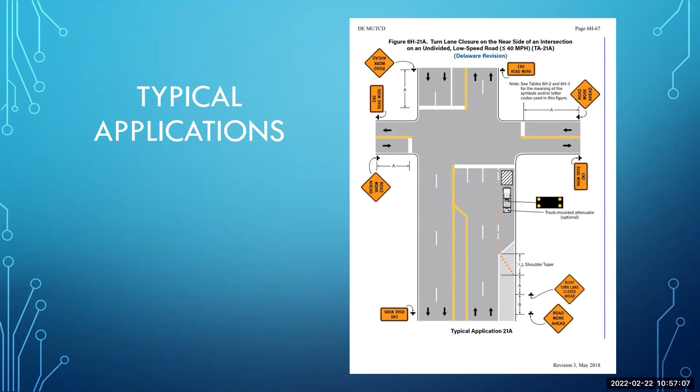TA21A is a fairly new typical application. This is where we're just closing a turn lane. Rather than putting shoulder closed or right lane, we now require the use of right turn lane or left turn lane.

Here is TA27, an intersection closure. Again, if you're working in the middle of an intersection, pulling lines over the intersection, we prefer this at low volume during off-peak times, but this is a way to flag through the whole intersection.

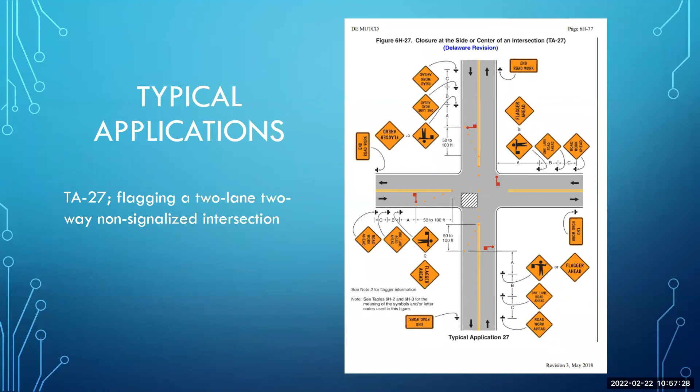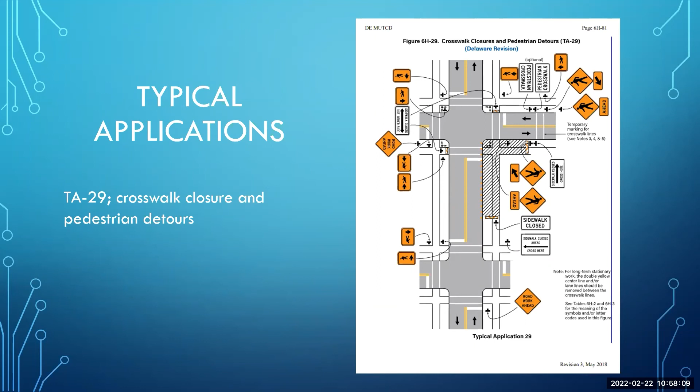TA29 is more of a crosswalk, instituting a mid-block crossing for a detour route. These have to be designed and reviewed in depth, because we typically don't want to put mid-block crossings in unless it's absolutely necessary.

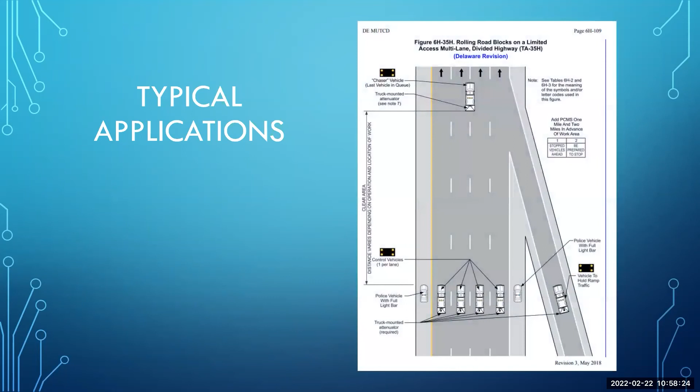Dan touched on TA33, lane closure on a multi-lane highway, divided, high speed, and TA35H, which is the rolling roadblock. Again, we don't allow work over live traffic, so coordinate with us and your public works contacts. And that's it, thank you.

All right, so now it's going to go over to Steve.

We want to make sure that the traffic's safe, but more importantly, we want to make sure you guys are safe. The other thing to consider is the fact that we want to try to keep the pedestrians out of that construction site. We want to have them routed around so they're still moving, but most importantly, not moving through your construction site. That keeps it safe for everybody.

Things to consider—it should always be available when you're going out to do a construction project because of maintenance or some form of emergency. So once again, secure the site. Establish your maintenance of traffic as soon as possible.

If DelDOT is not already present, contact us. Be prepared to tell us the location, the nature of the emergency, and the current impact to traffic. These are all the things that we're going to need to know so that we can either facilitate you, help you, or notify the drivers to stay away from the incident.

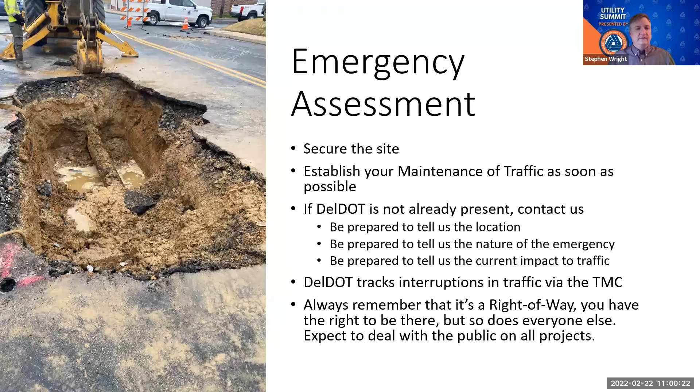So you guys lost my voice, it looks like.

Emergency permits: the District Public Works Office is notified of all emergency utility work. Emergency permits shall be submitted ASAP. If work is performed after hours, the permit should be submitted the following business day to outline everything. Permits and associated restoration will be inspected and tracked per the manual, and Public Works inspectors will determine the scope of the repair needed in the right-of-way.

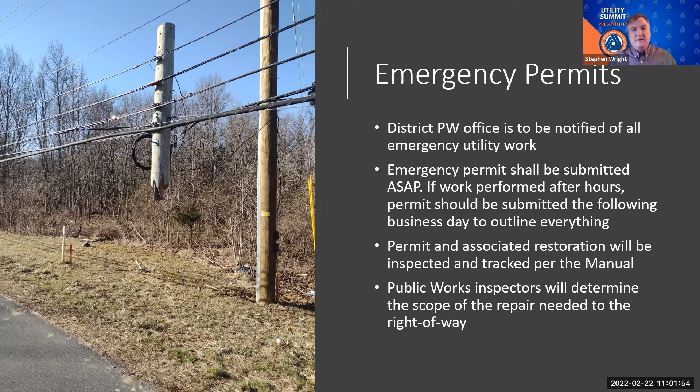Unfortunately, we weren't getting the response from utilities in terms of what would be, quote, an emergency from their perspective. But from our perspective and from the safety of the traveling public, that very much was. So I wanted to highlight that and discuss the aspects of how we look at it versus sometimes how the utility companies do.

Could I get you to push me back? I'm not fully—could you push me back 2 slides? I don't currently have control over the slides.

There. Okay, now go one forward.

Perfect. Scope of work. One of the reasons you're contacting Public Works is to have us come out there and take a look at the scope of work. Sometimes—actually, let me take a step back.

So the first picture that I showed, which you've seen a couple times, was the original burst, which went in a line straight down the roadway. One of the reasons Public Works needs to be called right away is because we have to go out there and help identify what the actual scope of the project is—where the failure damaged the road.

It is the responsibility of the utility to maintain traffic during the entire maintenance operation. As we've discussed, often we talk about an emergency as something that's a quick fix, but this is not a quick fix. This is the other type of operation that can happen through maintenance, where it's a substantial impact. There's going to be a lot of work, and it's going to take some time to get this constructed. So keep in mind, utility companies, we're trying to encourage you to really think that through, and know that sometimes these situations are going to last a long time. It's not going to be, I fix it and call in and be done.

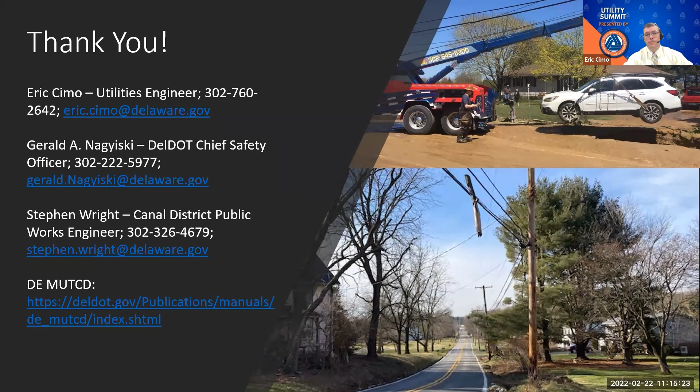All right. So we are ahead of schedule, which everyone should expect when dealing with utility companies, because we're just awesome. So I appreciate everybody's time. I am going to turn it over to Monroe to close us out.